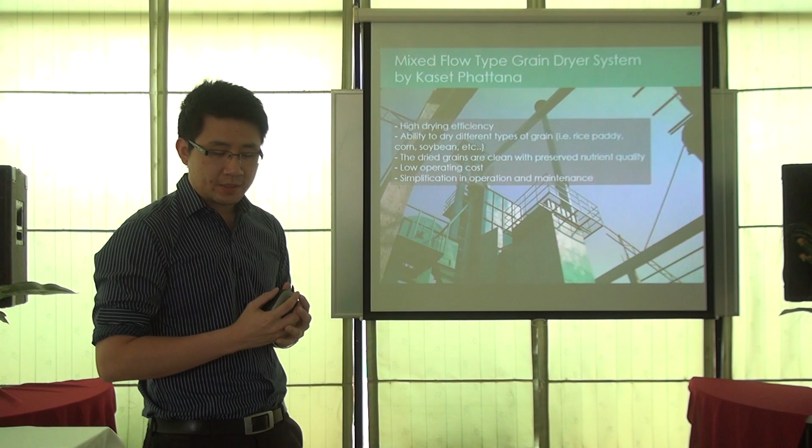Now, let's get into the second part, our mixed flow grain dryer system. Kaset Phattana grain dryers have been designed to perform at high efficiency and high productivity. The dryers are able to dry different types of grain, for example rice, corn, or soybean. The moisture shrinking of the grains is very well controlled due to the mixed airflow method. Because of the indirect heating system in our grain dryers, the dried products will be very clean, because there is zero contact between the grains and the fire smoke.

The first component I would like to introduce is the most important component in our grain dryer system, the grain drying chamber. We engineer our grain dryers to have very well-controlled moisture shrinking and a very well-controlled temperature decrease. Most importantly, we design it to have the most suitable airflow rate relative to the rate of grain flow within the drying chamber. This is made possible by the opposing flow between the heated air and the grains.

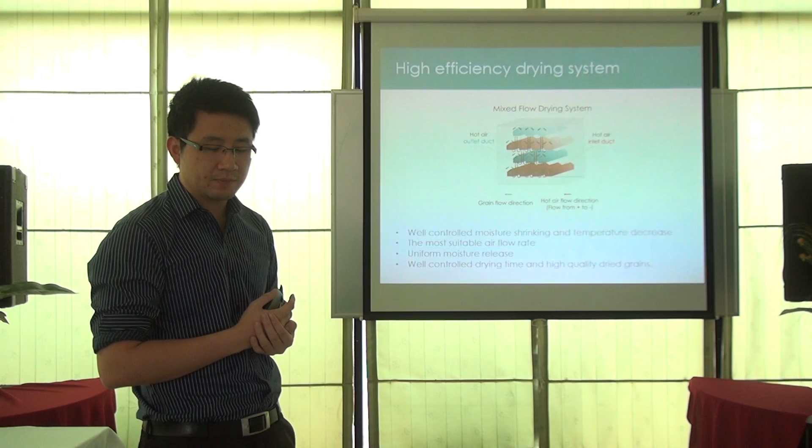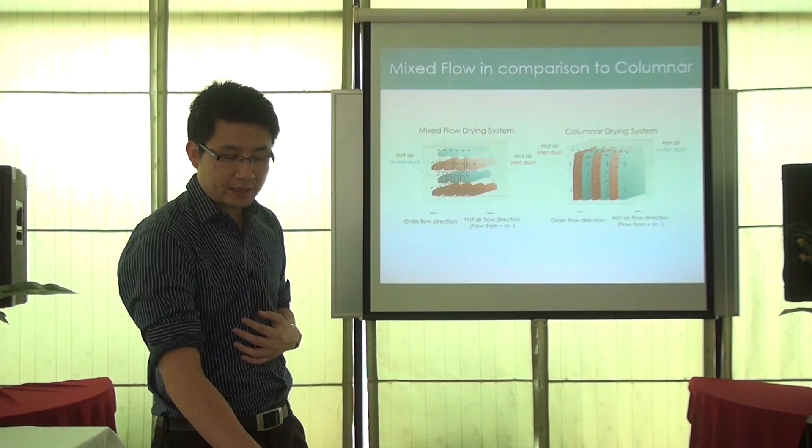What this means is that the grains within the drying chamber will release moisture uniformly, resulting in a well-controlled drying time and a high-quality product. We prepared a comparison between our mixed flow grain drying system and the columnar drying system. First, let's look at the convention. In this diagram, the green arrow represents grain flow direction, and the red arrow represents hot air flow direction, which ultimately flows from plus to minus.

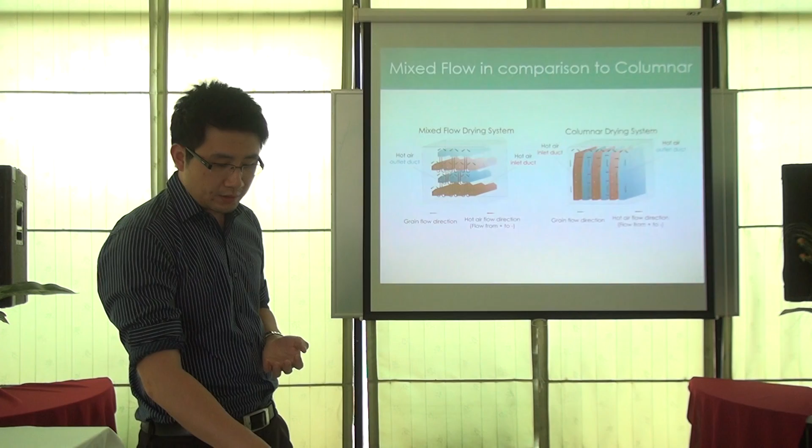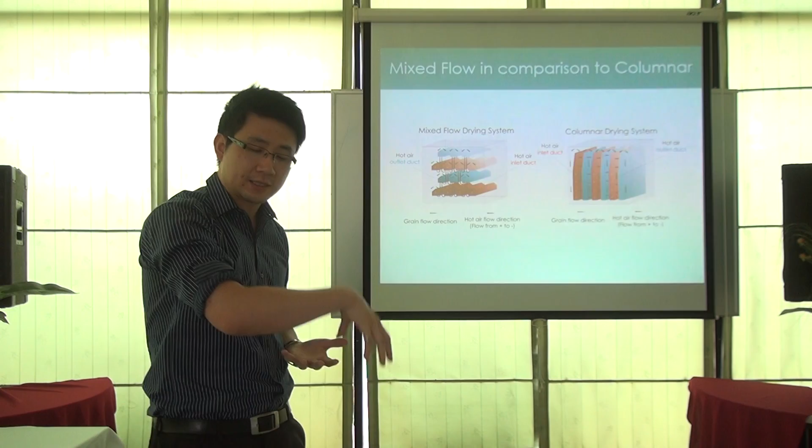In the grain drying chamber, the hot air flows in via the hot air inlet duct, the red duct there, and exits at the hot air outlet duct, the blue ducts. Let's first look at the columnar drying system on your right. The grain flows vertically downwards between the hot air inlet and outlet ducts, and the hot air flows horizontally across from the inlet to the outlet duct. This results in an uneven airflow distribution.

Why? Because grains closer to the hot air inlet duct have a higher chance of being exposed to the hot air. Also, because the grain flows straight downward, the residence time of the grain inside the drying chamber is quite short, which further reduces drying efficiency. So unsurprisingly, grain drying in the columnar system is not very uniform.

Now, the situation is different in our mixed flow drying system. It optimizes airflow distribution and hot air exposure for all grains. Because the hot air inlet and outlet ducts are structured in switching levels, the hot air flows in all directions, vertically and horizontally. This results in very uniform grain drying and very high drying efficiency.

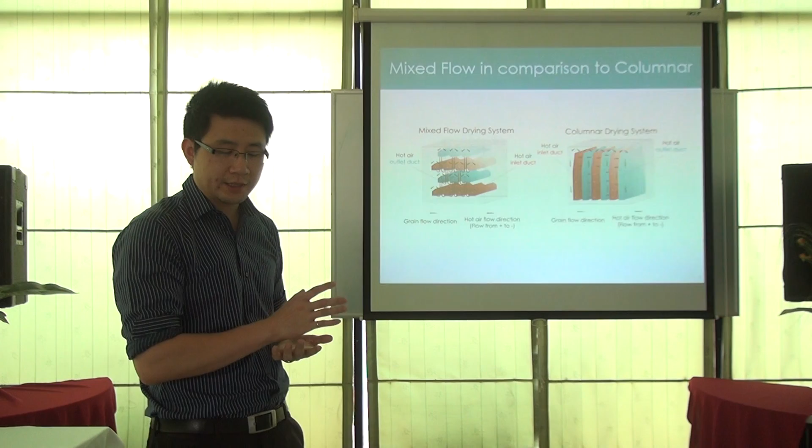To put things into perspective, with our appropriately developed design elements, the physical phenomena of the control between hot airflow and grain flow within the drying chamber, our grain dryers are able to achieve drying capacity of up to 4 batches per day, which is incredible.

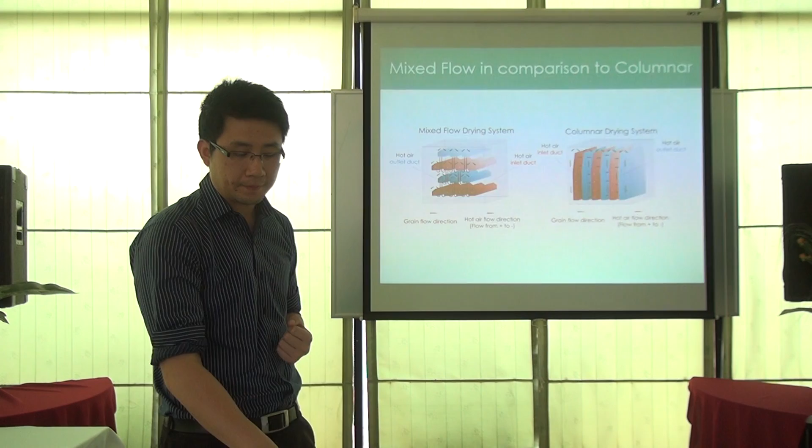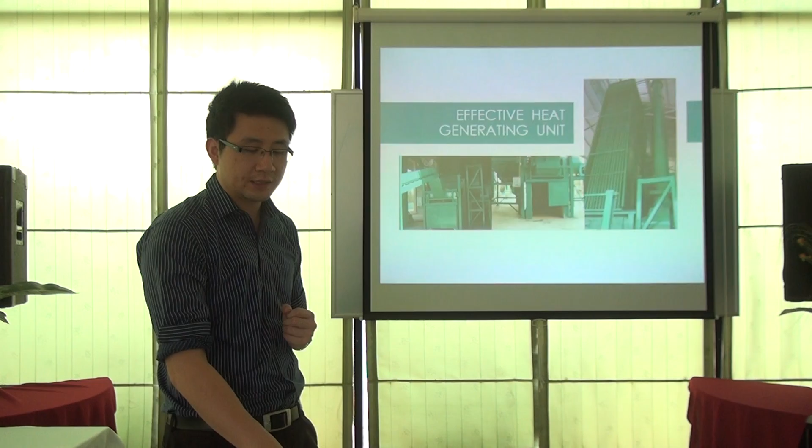Now, the next component that's also very important is the heat generating unit. Let me introduce our heat generating unit. Here I have the schematic of the heat generating unit.

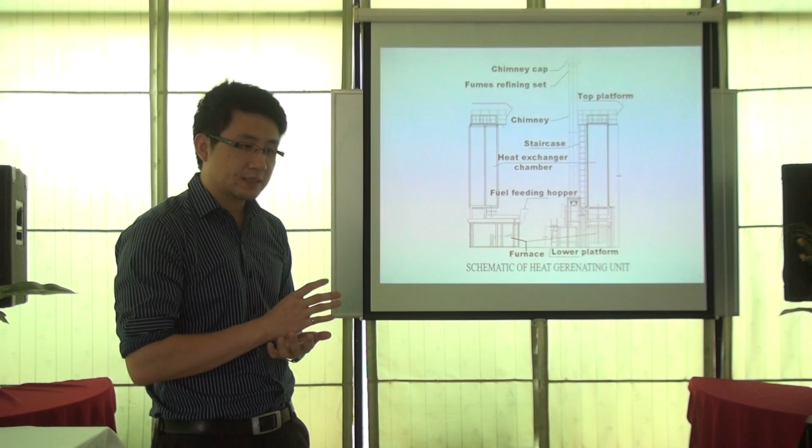The temperature of the heated air can be easily controlled via the fuel feeding rate, and the furnace is equipped with an exhausted fumes confining set. This means that the exhausted air will not pollute the surrounding environment.

Next, let me introduce the concept of heat exchange via the heat exchanger we have in our grain dryers. With this indirect heating system, through the heat exchanging chamber, ambient air is forced to flow past an array of hot pipes in the heat exchanger, in which the hot fumes air from the furnace is flowing inside.

The heated air from this heat exchanger chamber is then used to dry the grains within the drying chamber. This means the heated air carries zero smoke and zero dust to the grains, resulting in a clean, dry product.

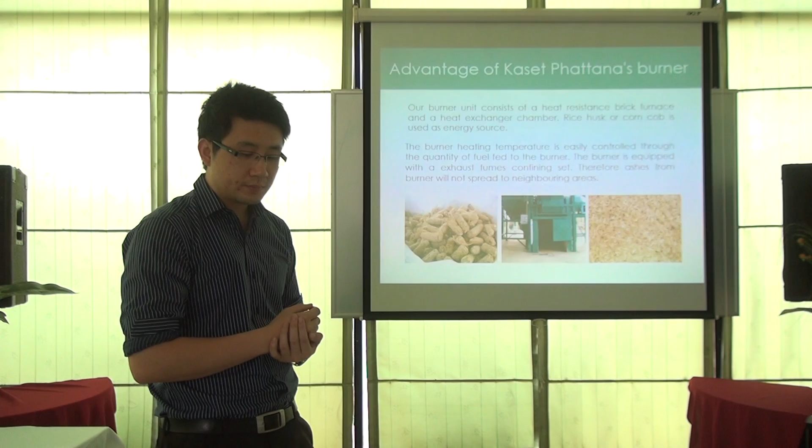Our burner uses a heat-resistant brick furnace and also uses agricultural waste such as rice husk or corn cobs as an energy source. It's quite easy to find, very abundant, and the temperature can be easily controlled via the quantity of fuel fed into the burner.

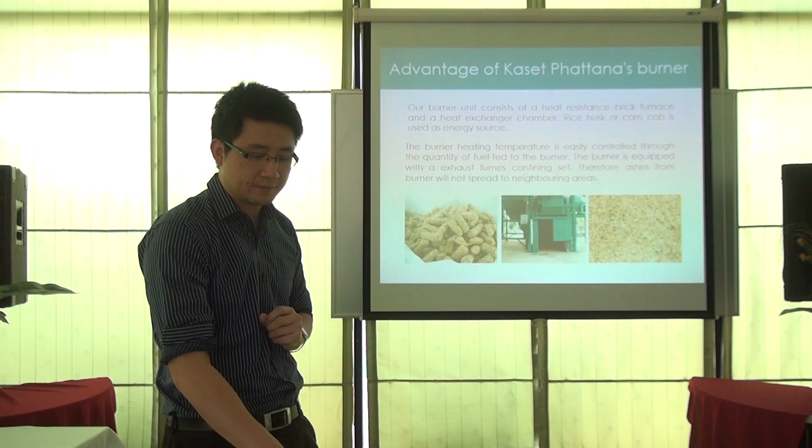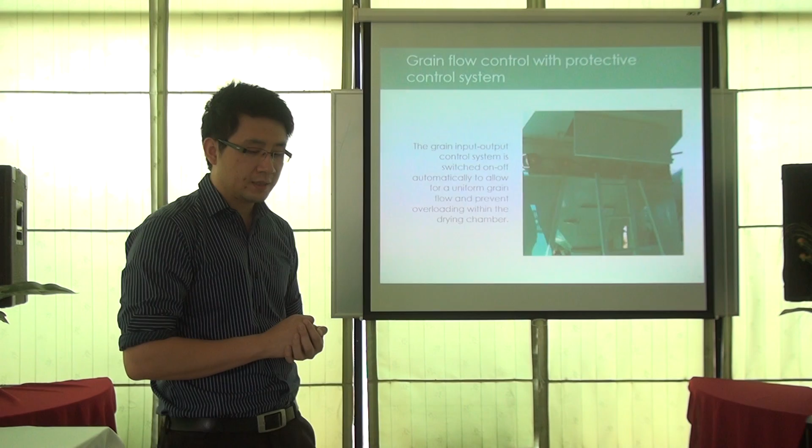Our grain dryers come equipped with a grain flow control and protective control system. The grain input and output control system will be switched on and off automatically, for uniform grain flow and to prevent overloading of the drying chamber.

Another design factor we took seriously is the environment, so our dryers are environmentally friendly. All the hot air going into the drying chamber is sucked in and blown off by multiple axial flow aspirators. Because these aspirators are equipped with a dust detecting chamber, the exiting air carries minimum dirt to the environment.

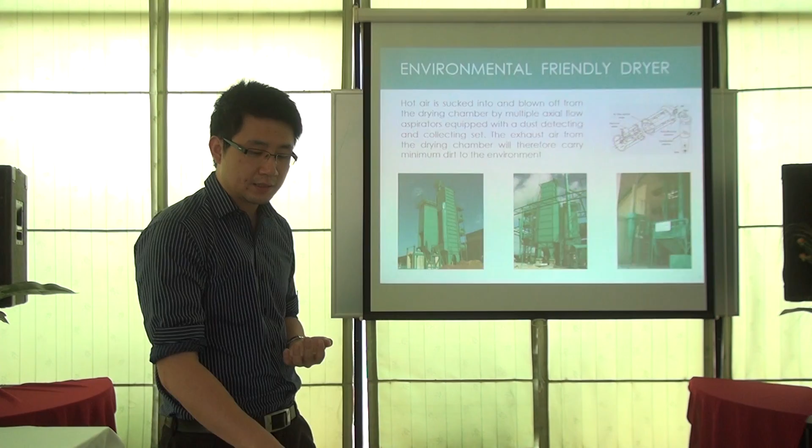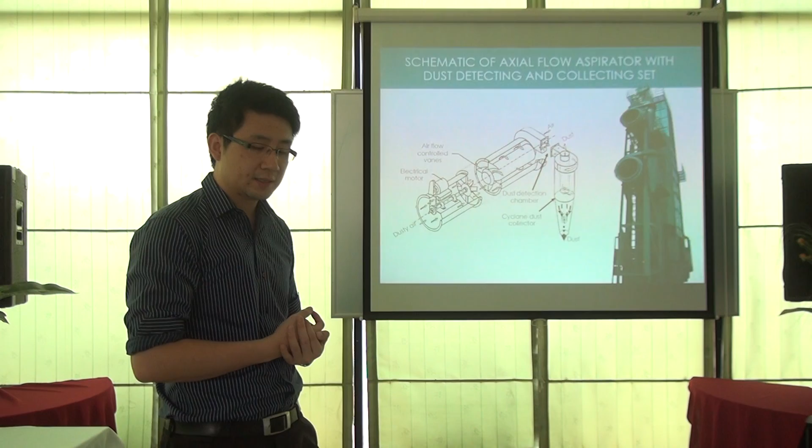Here I have the schematic of the axial flow aspirators. The dusty air goes in from your left and passes through the airflow control vanes, then into a dust detection chamber. Most of the dust particles are collected within the cyclone dust collector, so the exiting air is quite clean.

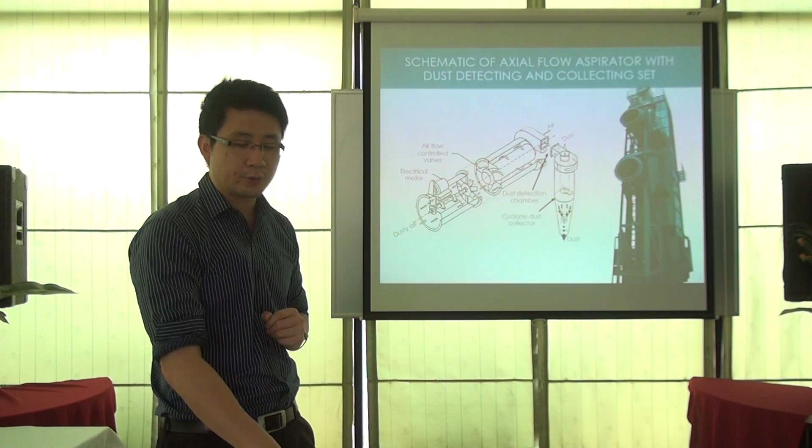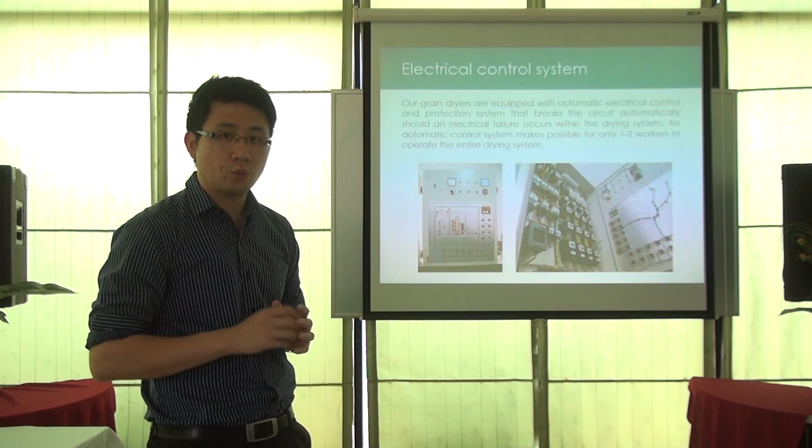Our grain dryers are equipped with an automatic electrical control and protection system. This system will break the circuit should there be any electrical failure within the drying system, and the automatic control also makes it possible for only one or two operators to operate the entire drying system.

Another important design factor we pay close attention to is manufacturing. Our parts production is carried out by computerized machines. For example, our sheet metal cutting is all done by a computerized laser cutter, programmed by a team of professionals.

We also use automatic computerized machines to fold each workpiece. The results are small error tolerance and very high durability. Because of these high standard parts that we make, all our grain dryers have a very long service life.

To put things into perspective, I've prepared an illustration of our grain dryers installed inside Thailand. Note that in each province there may be multiple installations, but to keep things simple for this presentation, I'm only showing one dryer per province.

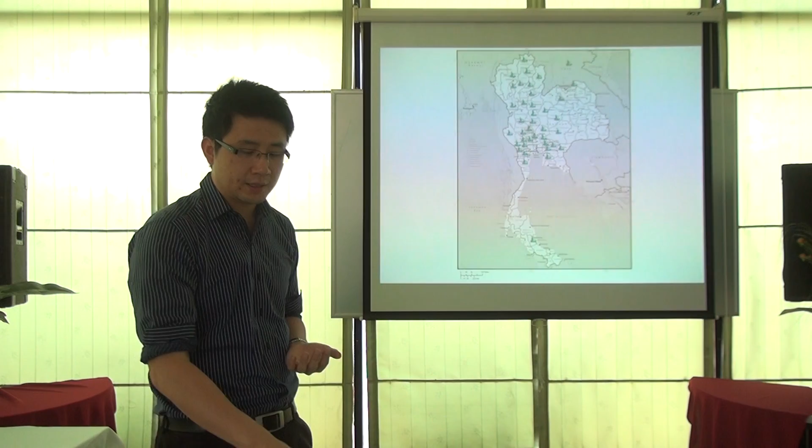Last but not least, I'd like to introduce a little about our models currently being produced. We have KDP6, KDP11, KDP15, KDP27, KDP33, and the biggest one, KDP38. The numbers beside the models correspond to the holding capacity of the drying chamber. For example, our KDP27 can hold up to 27 tons of paddy per batch.

But this is where it gets interesting, because our grain dryers differ from our competitors. Using a mixed flow grain drying method with appropriately designed elements, our grain dryers can actually dry up to 4 batches per day. So even though the KDP27 can hold 27 tons per batch, in one day you have a drying capacity of approximately 100 tons.